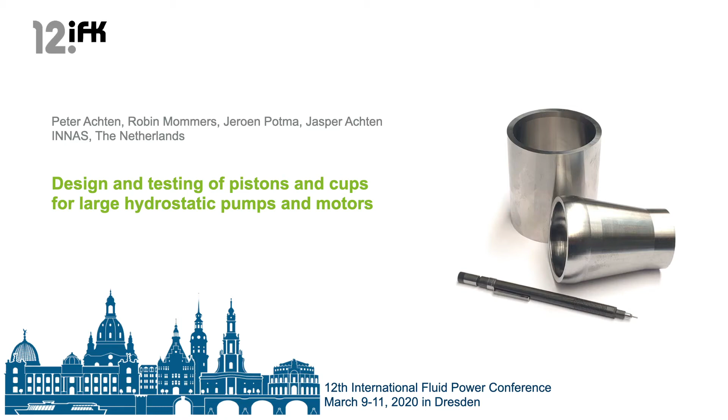This presentation will be about measurements and testing of pistons and cups of our floating cup principle. I'm standing here in our lab where we are testing a 45cc pump. It's a floating cup pump and it's actually running now. I hope you can hear it running in the background.

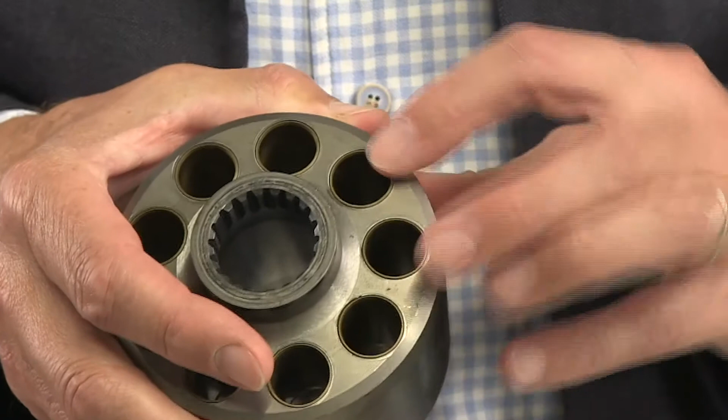In conventional axial piston pumps and motors, the cylinders are drilled into the central barrel or cylinder block. And here I have such a block. As you can see, these cylinders can't move. They are, so to say, the passive part of the design. The active part belongs to the pistons, and these pistons need a certain number of degrees of freedom. For instance, these slippers which are running on a swash plate. Without these degrees of freedom, the pump would not be able to work.

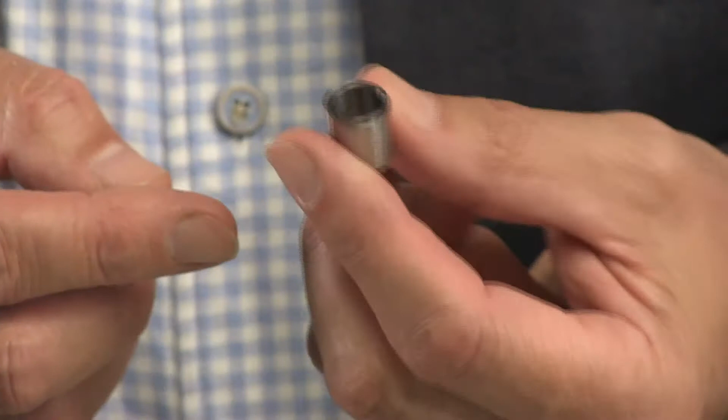In our floating cup principle, we have reversed this design. Now, the pistons have become the passive part. They can't move. They are locked onto the rotor. On the other hand, we have the cylinders, which are now separated from the barrel, and they can move. We call these cylinders cups. Each of these cups is translating and tumbling on a ball-shaped piston crown.

Now, if you have a ball in the cylinder, it means that you have a line contact between the two components, which means that you need to have a very precise manufacturing of these two components in order to avoid excessive leakage. Aside from reducing the leakage, the floating cap principle also eliminates the problem of high friction losses between the pistons and the cups. We built a special test bench to measure the friction and the leakage of cups and pistons like these, while the piston is moving on top of or inside the cups.

Now, this works for small piston diameters. In the past years, we have built many prototypes to test and prove the high efficiency of floating cup pumps and motors. However, does the principle also work if the pump or motor needs to be larger, much larger than this small unit? Let's say 100 times larger. So not 45cc, but 5000cc per revolution.

Will the pistons and caps also have low friction, low wear, and low leakage if they are not this size, but this size? Furthermore, is it anyhow possible to manufacture these relatively large components from very hard material with a micrometer precision? These questions were asked by Hydratrans, a company developing transmissions for large offshore wind turbines. We also had a close cooperation with a company called VDL ETG, which did a marvelous job in manufacturing 11 pistons and cups with a high precision.

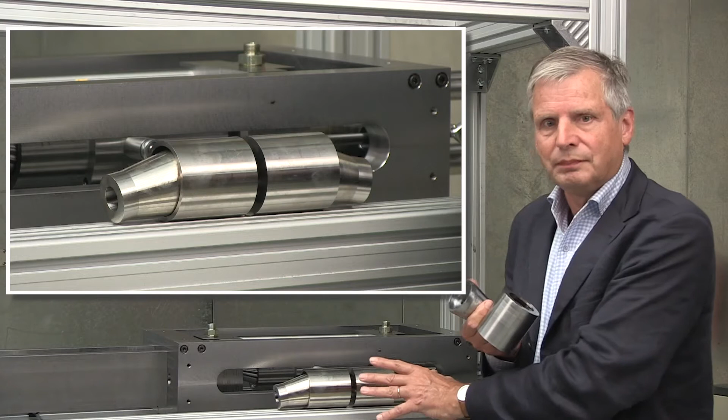But before showing you the test results, I want to show you the test bench on which these large cups and pistons have been tested. In this test bench, two pistons and cups are measured at the same time. At a maximum pressure of 350 bar, the piston force is 120 kilonewton, but the friction force is expected to be smaller than 100 newton, which is far less than the piston force, less than 1/1000th of this force. Now, how to cancel this big force, how to eliminate it? We did it by positioning two sets in a mirrored construction. And by this we were able to cancel the main hydrostatic forces of the piston and cups.

One of these sets is the reference set, which is designed and measured to have no friction or no measurable friction at all. A linear actuator is moving the pistons inside the caps, and the cups are positioned in the middle and are held by a yoke which is connected to a force transducer. And this allows us to measure the friction during the entire stroke while the piston is moving inside the cups. It also allows us to measure the leakage during this movement.

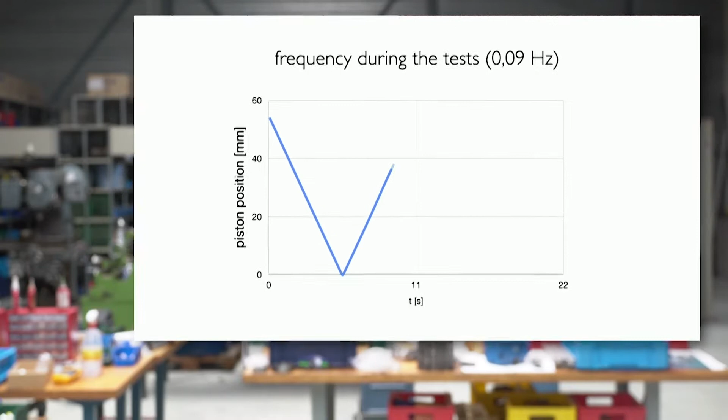Here you see the piston and cup test bench during one of the first test runs, moving at a frequency of around 1 Hz. During the measurements, the cycle frequency was much lower, and this graph shows, as a function of time, the movement of the piston up and down inside the cup. As you can see, the frequency is much below 1 Hz.

There was a reason why we decided to test at such a low frequency. Lifetime and durability are crucial for wind turbine applications. And we therefore decided to test the pistons and cups at the worst possible tribological conditions, which is at low piston velocity when there are no or almost no hydrodynamic effects to create an oil film. For this reason, the frequency was reduced to around 0.1 Hz during the tests.

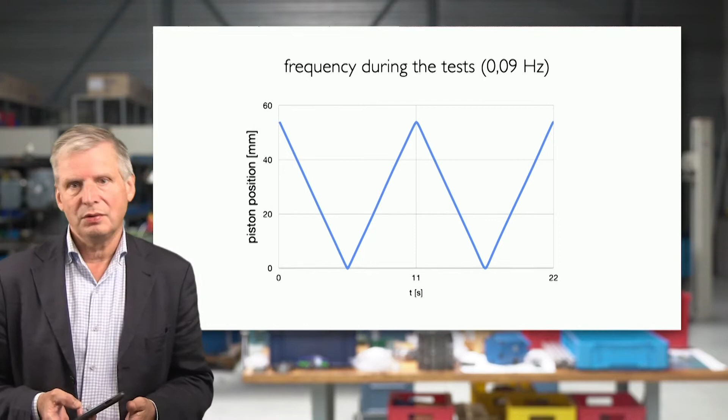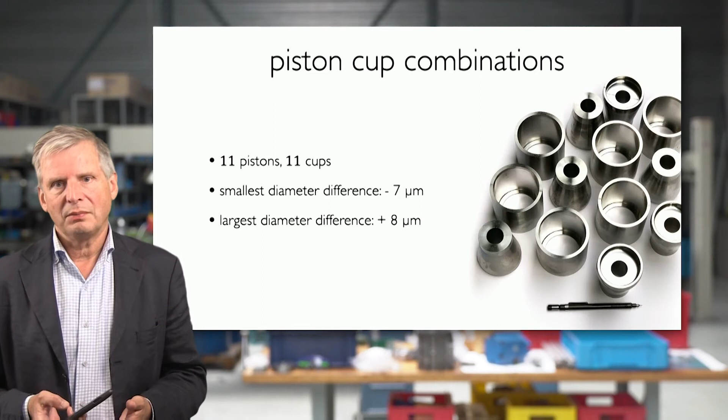As I have mentioned in the introduction, we received 11 pistons and cups, all having slightly different piston and cylinder diameters. And this allowed us to create several different piston and cup combinations with different tolerance ranges. The tolerance difference, or the difference in diameter, varied between -7 micrometer for the most tight combination to +8 micrometer for the combination with the largest clearance fit.

Of all the combinations we measured, this set with the tightest fit had the best performance. As you can see, the piston has a diameter which is 7 micrometer larger than that of the cup cylinder. In this presentation, I will only show you the results of this combination.

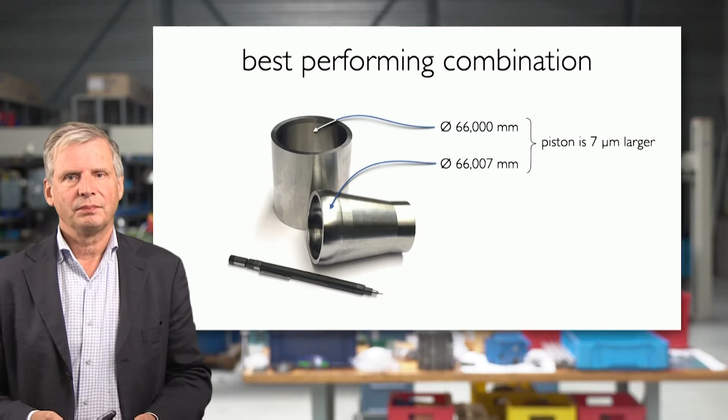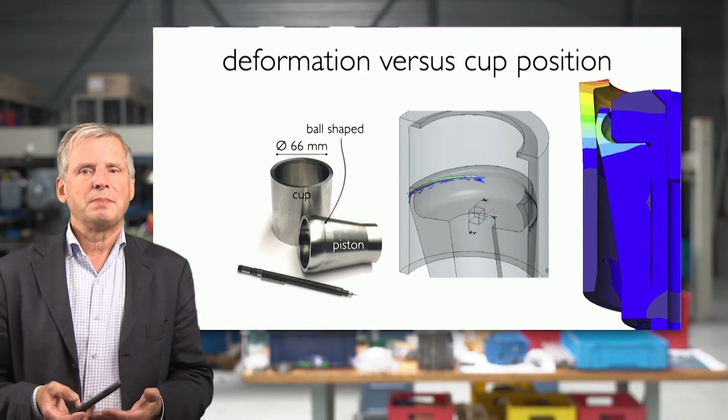Now, before coming to the results, you have to understand that the cups and pistons deform when being pressurized. The deformation is strongly dependent on the shape and the dimensions of both the cup and the piston crown. In addition, the deformation is also dependent on the position of the piston inside the cup.

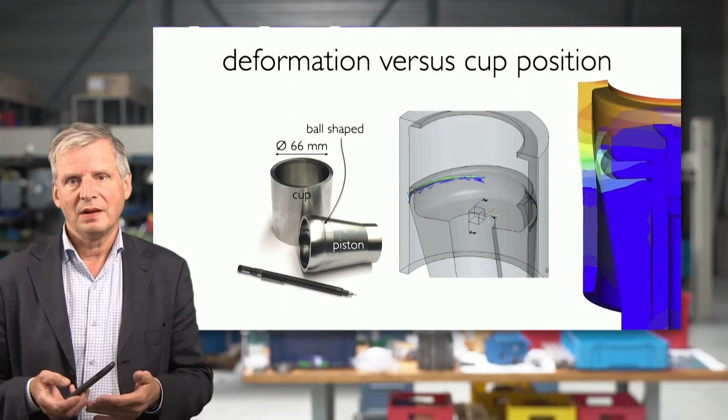Now, the trick is to control the deformation in such a way that at the sealing line, the radial deformation of the piston crown is always identical to the radial deformation of the cup. And this needs to be true for all piston positions, as is shown here in this FEM analysis at various piston positions.

Now to the test results. First, the measured friction. Here you see the measured friction force while the piston is moving back and forth between the two outer positions, the top and bottom dead center, the TDC and BDC. At a pressure of 50 bar, the friction force starts in the bottom dead center position at a value of around 70 Newton. From here on, the friction force reduces almost to 0 Newton during the first half of the stroke. And after that, it stays very low until the end of the stroke.

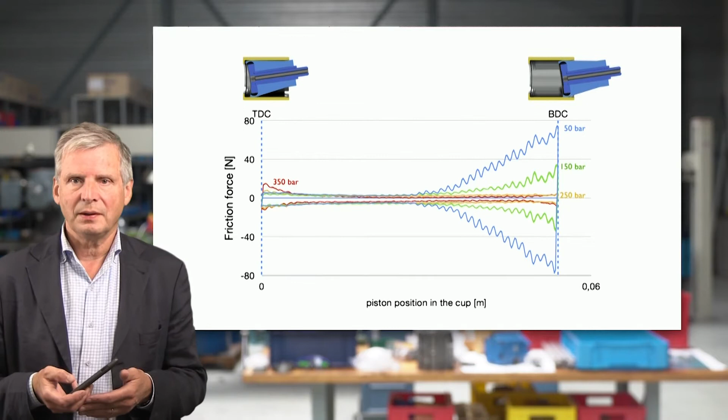The same happens during the return stroke, only now the friction force has a negative value due to the opposite direction of the piston movement. As soon as the pressure increases, the initial friction force in the BDC reduces. For pressures of 250 bar and higher, the friction force becomes lower than 10 Newton during the entire stroke. Even when the pressure is increased to 350 bar, the friction force is generally below 10 Newton. And please remember that at this pressure, the piston force is 120,000 Newton.

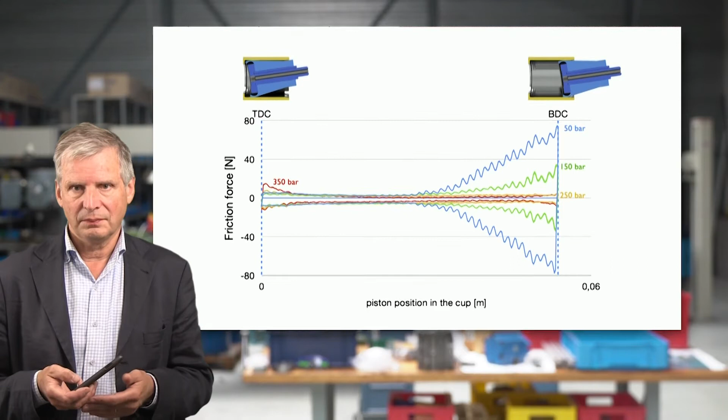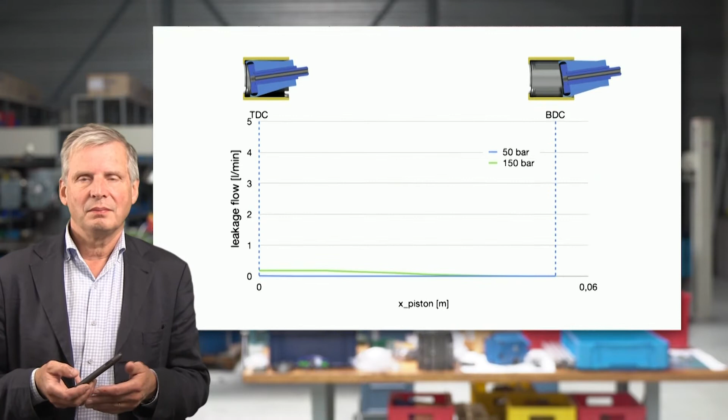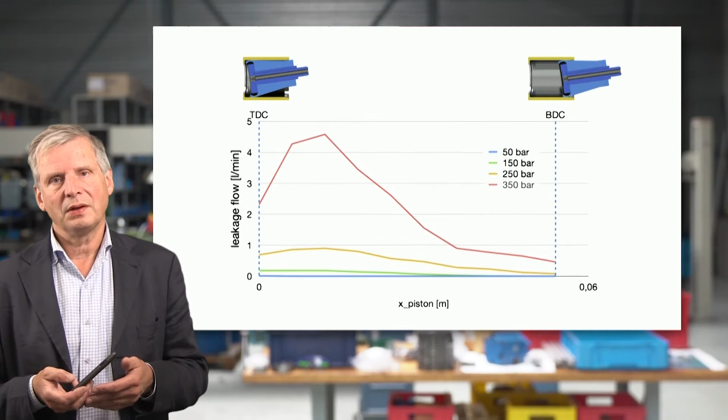We also measured the volumetric loss in the gap between the piston and the cup. At 50 bar, the leakage is close to 0. At 150 bar, the leakage is somewhat higher, but is still very low. However, the leakage turns out to be strongly pressure dependent, and these are the results for 250 bar and 350 bar. Of course, the results which I showed to you were only the friction and leakage for just one single piston and cup.

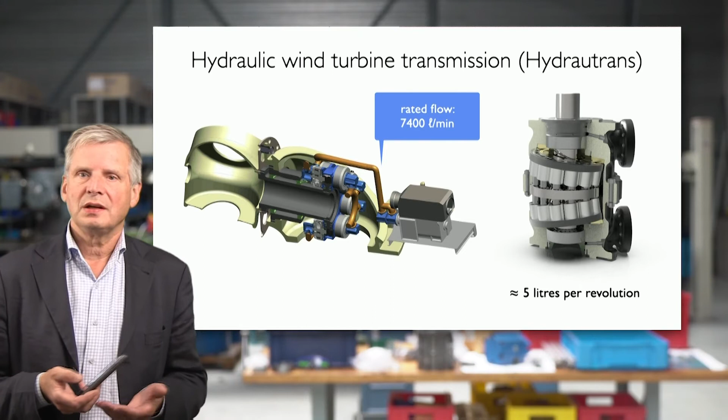The rated pump pressure is 270 bar. This is the pressure at which the system will be running for most of the time. The transmission is designed also for a peak pressure of 350 bar. The rated flow is more than 7,000 liters per minute. With these data, we can calculate the effect of the friction and leakage losses of the pistons and cups on the entire transmission. The friction losses are highest at low operating pressures, but even then the friction loss is very low. At the rated pressure level, the friction losses of both the pumps and motors are close to zero.

The volumetric losses are somewhat higher. At the rated pressure, the total piston cup leakage amounts to a volumetric loss of 0.5% for the pumps and a little bit more than 0.1% for the motors. We wanted to know if the volumetric losses could be reduced. Our FEM analysis showed that the sealing between the pistons and the cups could be improved by a small change of the piston design. This drawing shows where we made the change in the design.

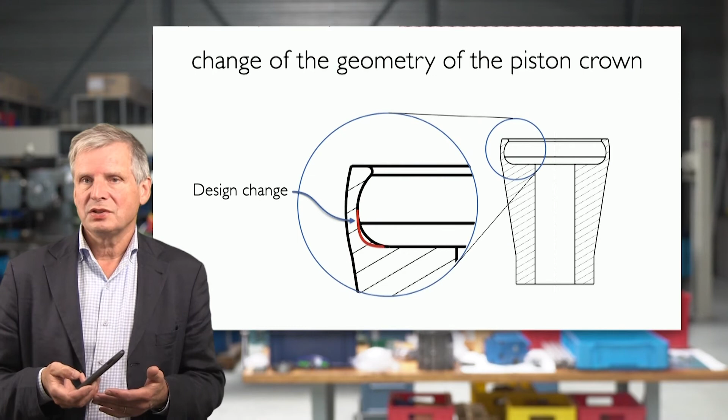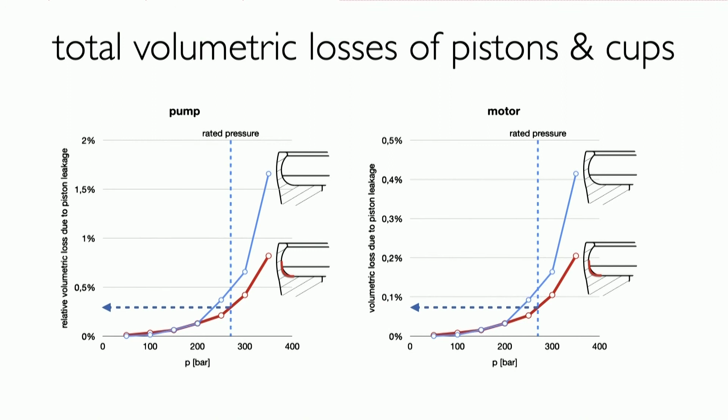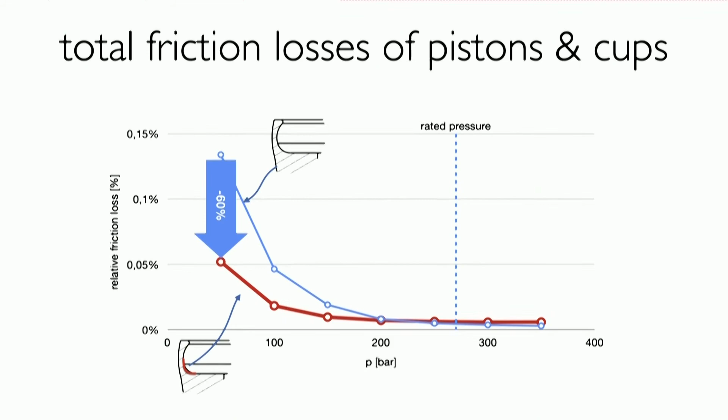The small design change resulted in a significant reduction of the leakage by almost 50% at the higher pressure levels. The new design made the piston crown more flexible, which also resulted in a reduction of 60% of the friction losses at low operating pressures. At the rated pressure, the new design had almost no influence. With these final test results, we again calculated the effects on the entire wind turbine transmission, and this table summarizes the overall results. The measurements have proven that it is possible to reduce the overall losses of the pistons and cups to below 0.4%. This is the total loss for all pistons and cups, combined together for all pumps and motors in the transmission.

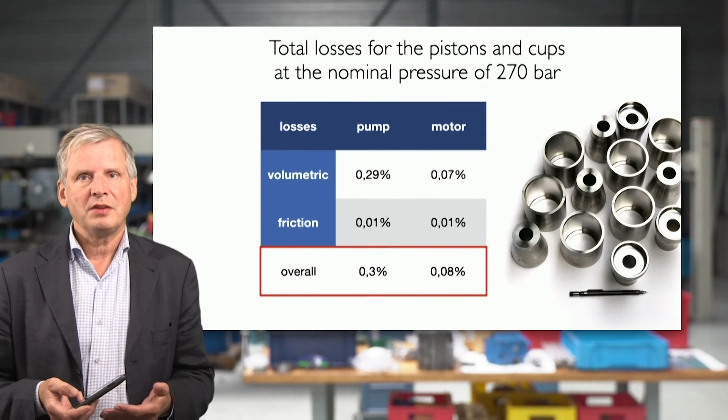Of course, there are more losses in the hydrostatic transmission, such as flow losses and bearing losses, and other friction and volumetric losses. But the piston friction and leakage losses are a significant, if not dominant, portion of the total losses in conventional piston pumps and motors. And this is where the floating cup principle brings a change. It strongly reduces the piston leakage and the friction, even when the pump or motor has a displacement of 5 liters. So here we are back in our lab. As you can hear, the pump is still running in the background.

Now, what did we learn from our projects, from our experiments? First of all, we learned that it is possible to manufacture these relatively large components with a micrometer precision from harder material. We also learned that it's possible to machine these components in such a way that we can control the dimensions and the deformation, thereby reducing the volumetric losses to below 0.3%. The most interesting result is, however, that there's a very low friction even when the piston is 7 micrometers larger in diameter than the cylinder itself. The friction losses are truly negligible. And where there's no friction, there's no wear.